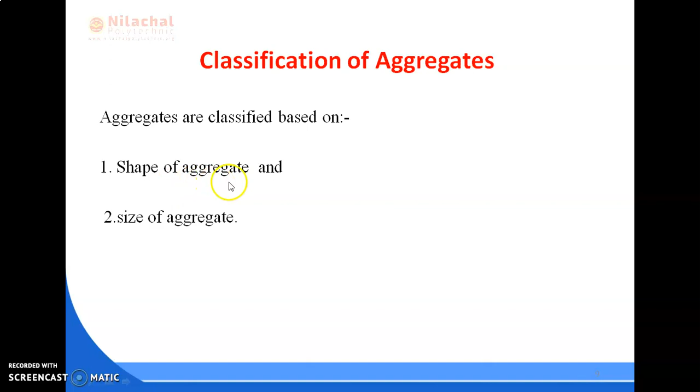In today's lecture again we will continue chapter 3. In the previous lecture we already discussed aggregate: what aggregate is, different qualities of aggregate, different characteristics of aggregate, the properties of aggregate which influence concrete, fineness modulus of coarse aggregate and fine aggregate, and different types of aggregate based on shape and size of aggregate. The first one, types of aggregate based on shape, is already discussed.

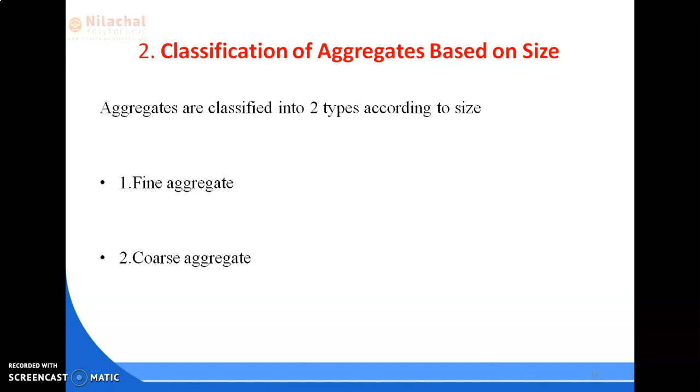So in today's lecture we are going to discuss types of aggregate based on size. Based on size, these are of two types: one is fine aggregate, another one is coarse aggregate. So let us discuss one by one. First is fine aggregate.

When the aggregate is sieved through a 4.75 mm IS sieve, the aggregate passed through it is known as fine aggregate. Natural sand is generally used as fine aggregate; natural sand, silt, clay are some examples. The purpose of fine aggregates is to fill the voids in the coarse aggregate and to act as a workability agent.

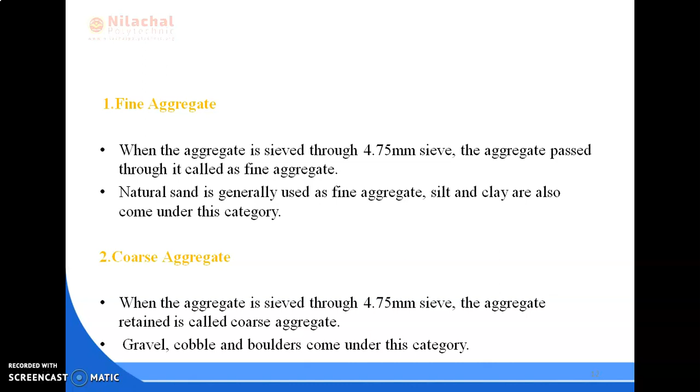Next is coarse aggregate. It is the opposite of fine aggregate. When the aggregate is sieved through a 4.75 mm IS sieve and the aggregate is retained on the sieve, it is known as coarse aggregate. Examples: gravel, cobble, boulder, etc. The maximum size of aggregate used depends upon some conditions. In general, 40 mm size aggregate is used for normal strength and 20 mm size is used for high strength concrete. So these are the types of aggregate based on size.

Next is what is grading of aggregate, or why grading of aggregate is necessary. The particle size distribution of aggregate as determined by sieve analysis is known as grading of aggregate. The gradation of aggregate plays a vital role in governing properties like workability and finishing of concrete. If all the particles are of uniform size, the compacted mass will have maximum voids, whereas particles of different sizes lead to a dense mass.

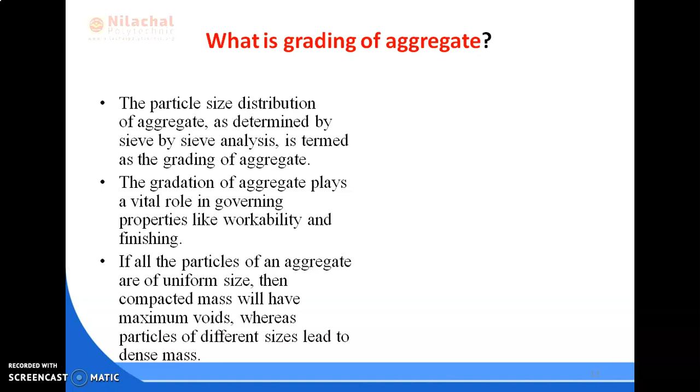The particle size distribution should be such that voids of larger particles are filled up with smaller particles. Proper grading of aggregate results in dense concrete and requires less fine aggregate and cement paste. Grading affects workability, which in turn controls the water and cement requirements, segregation, and plays an important role in placing and finishing operations of concrete.

Next is types of grading of aggregate. It depends on the different sizes of particles available in the aggregate. First, well graded aggregate: the aggregate is said to be well graded if the voids created by large particles are filled almost by smaller particles, leaving minimum voids to be filled by cement paste. It contains all sizes of particles, leading to a compact and dense concrete mix. This grading is considered the best because it leads to a lesser cement requirement.

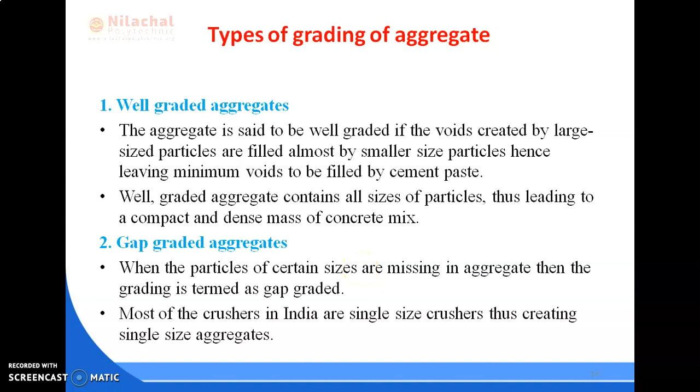Next is gap graded aggregate. When particles of certain sizes are missing in aggregate, the grading is termed gap graded. Most crushers in India are single size crushers, creating single size aggregates. Gap graded aggregate does not affect compressive or tensile strength of concrete. Next is poorly graded aggregate, in which the proportions of certain intermediate particles are deficient or present in excess amount.

The last one is continuously graded aggregate. The aggregate is continuously graded when it contains all particle size groups, from the maximum particle size to the minimum particle size. Such grading is termed coarser or finer depending upon the higher proportions of coarser or finer particles they contain in reference to the specified grading with which they are compared. So these are the different grades of aggregates.

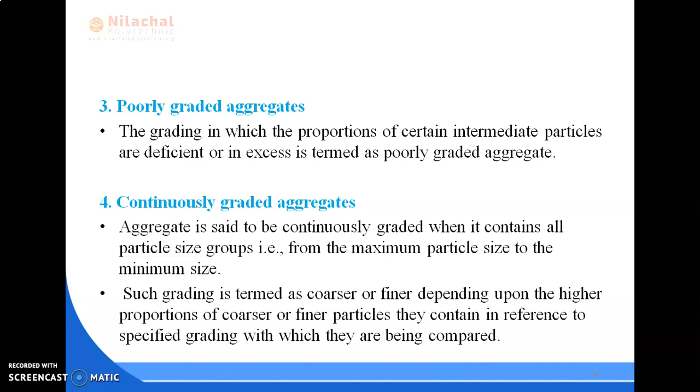There are also different factors which affect the grading of aggregate, like density of aggregate, segregation of aggregate, bleeding of aggregate, and strength of aggregate. So with this the aggregate part is completed. In the next lecture we will continue with the next part of this chapter, that is water.